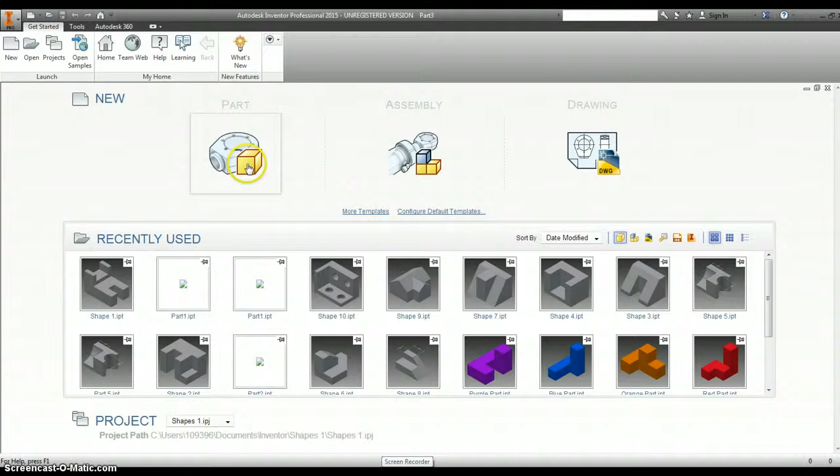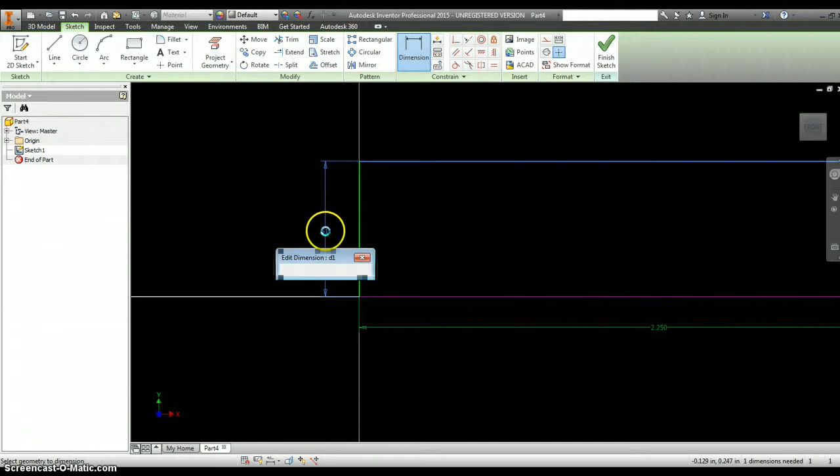Alright, so Inventor, make sure you're in your Shapes project. We're going to do Part. Start 2D Sketch. I'm going to go ahead and start on the front plane. And I'm going to draw my rectangle. Okay, and then I'm going to go ahead and dimension it. So this length right here, according to my picture, is 2.25. And then this length here is 1.5.

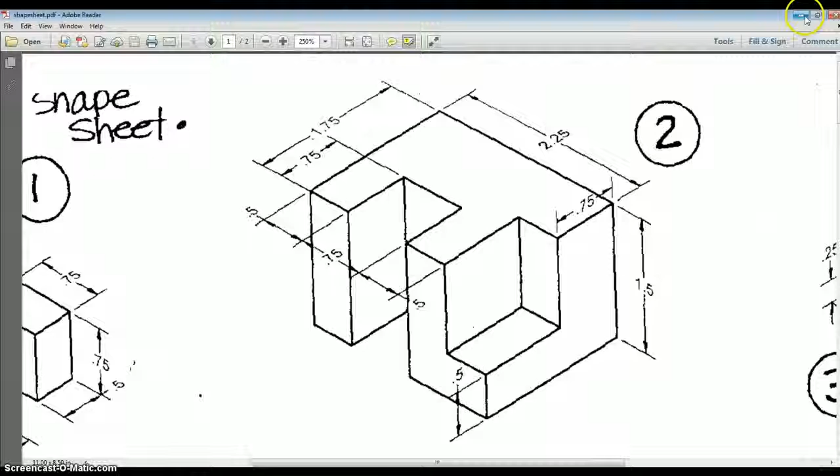Okay, I'm going to finish my sketch, right click, extrude, and it extrudes back 1.75. Okay, so this right here is basically this without my cutouts. Alright. So now I'm going to look at it, and I'm going to go ahead and start making my cuts. So I need to draw a rectangle on this face. So I'm going to select this face, I'm going to right click, and I'm going to hit New Sketch.

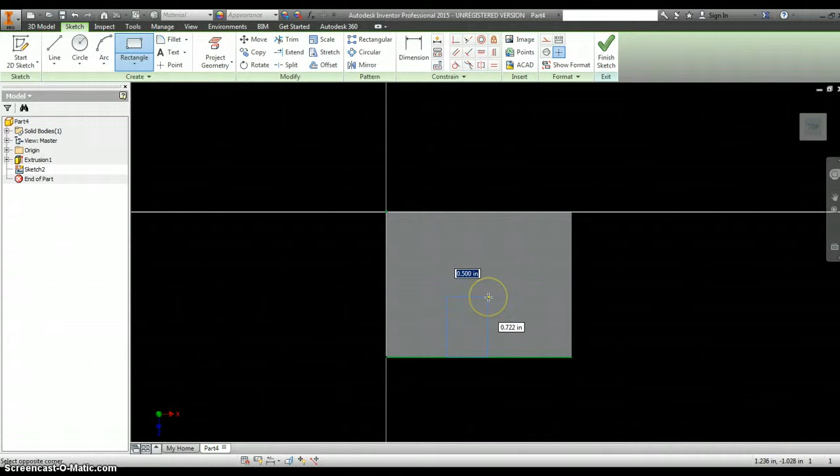Okay, and I know I'm going to put my rectangle about right here. So I'm going to do Rectangle. I'm going to go here till it grabs and turns blue. I'm going to click, go up, make my rectangle. Then I'm going to go and I'm going to dimension it. Closer here. So we're going to dimension it. If you're looking at your drawing, this distance right here should be 0.75.

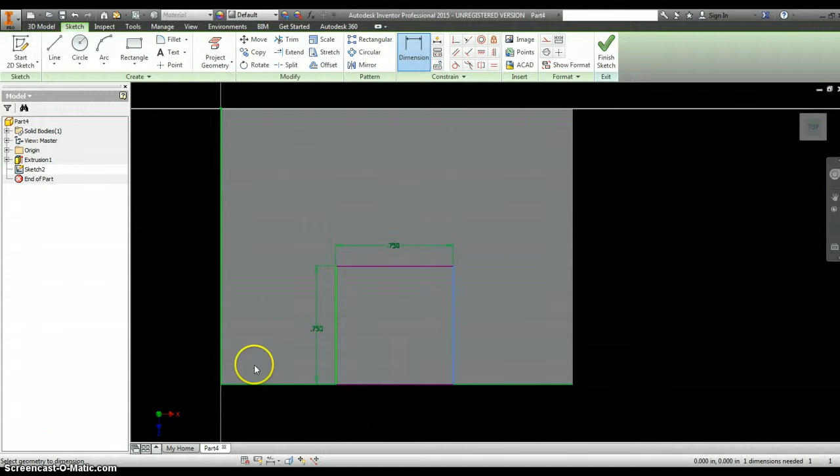Okay, and this distance here is also 0.75. Okay, so now we want to go ahead and make sure that it's pushed over enough to the right. So we know that the distance from this side to this side is, what does it say, 0.5. Okay, so I put my rectangle here, and I put it in the right orientation. I'm going to hit

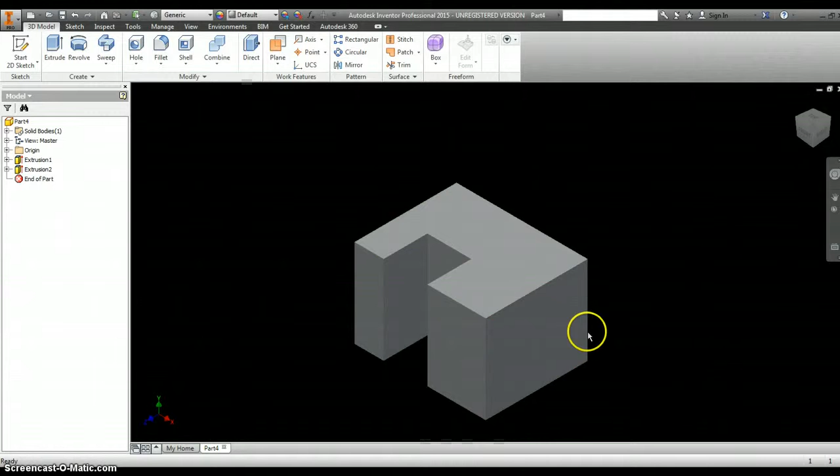Finish Sketch, then I'm going to right click on top, extrude. I'm going to select this face, and then I'm going to extrude it down. This one goes down all the way to the bottom, all the way through. So I'm going to go all the way through, and then hit OK. Alright, so now I have to do the rectangle that's right here. So I'm going to do right click, New Sketch.

Okay, and this rectangle starts at this corner. So I'm going to do my rectangle. I'm going to go to the corner, see where it grabs, where it turns green. Okay, I'm going to click it, and I'm going to drag. Right? Then I'm going to go ahead and dimension. I know that this distance right here has got to be, let's see,

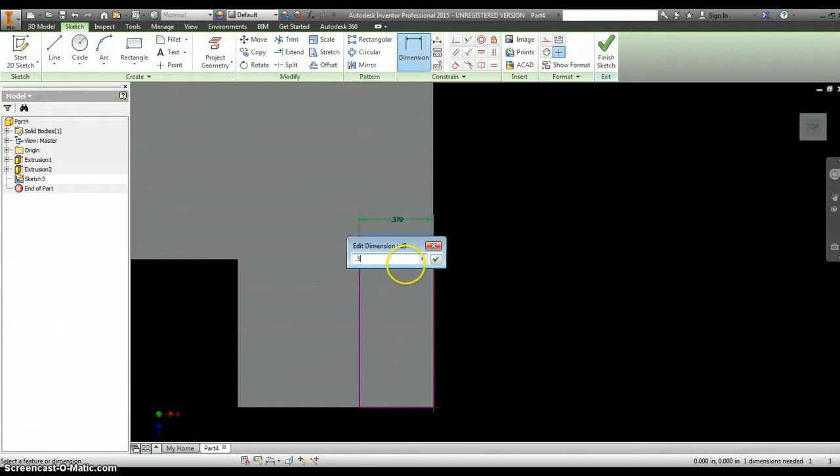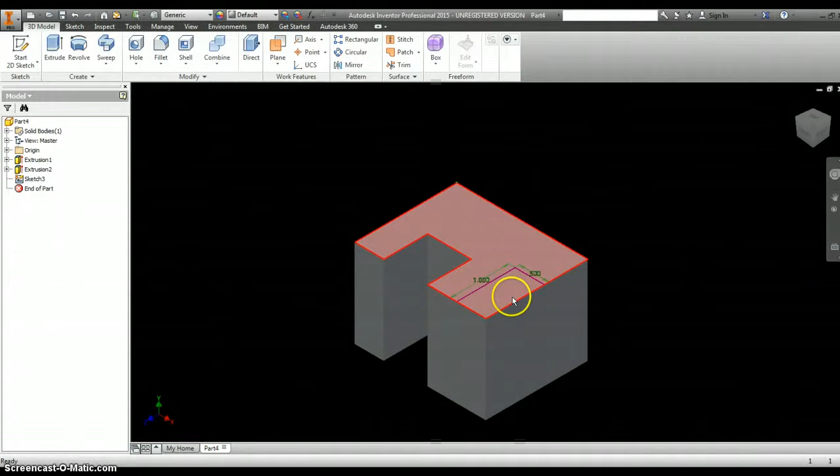this distance is 0.5, okay, and then this distance right here, let's see, if you look at your picture, the whole distance is 1.75, and then if you subtract this part right here, which is 0.75, I'll do the math for you. Okay, so now we've got our rectangle here. I'm going to finish sketch, I'm going to right click, extrude, and we want to go down.

Now, once it starts going down, once it gets to the negative, you can stop and then you can enter the distance. So it's gone down 1. So we're going to hit 1, enter, and there we go. Here is our finished shape number 2. This one's not really that difficult. Alright, so on to shape number 3.